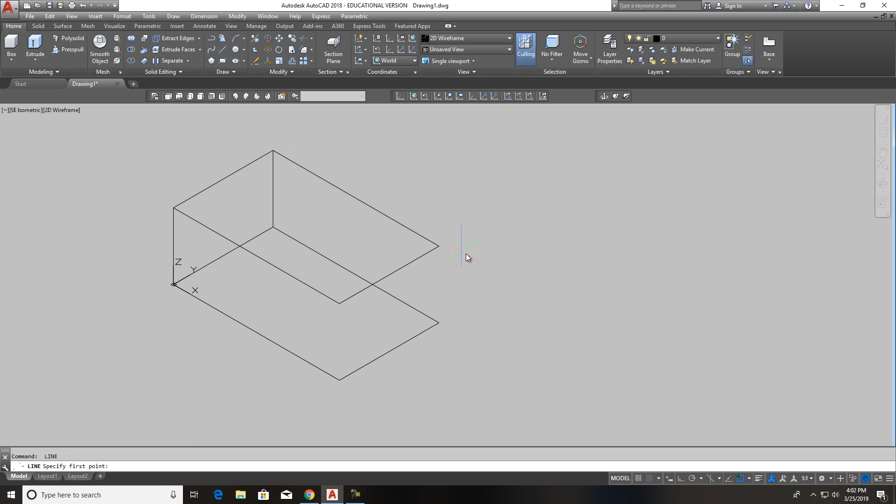And then I always like just to go ahead while I'm in here and just go ahead and connect the dots and make my square, and then I can work off that square to build whatever components I need to build. For instance, if you want to take and draw like a little offset here and down, let's do that.

Let's say I want to come over here maybe a half of an inch, shoot back over here. Just gotta make sure that you snap to it. Come up here, make sure you snap to it, make sure you snap to it, back down. And now I want to come up a half of an inch here, and then back, just like that. Across, make sure it's perpendicular, back across, perpendicular, tie everything in, and then you can pull everything back down.

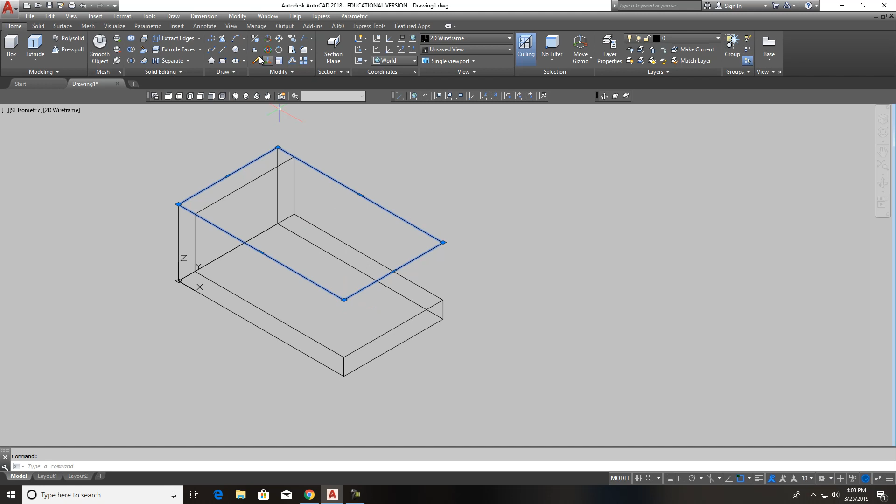Now, I know I've already had a video and you might have done this already, and if you have, that's fine. I just wanted to show you just a few little tricks that might help you when you're wireframing. Let's get rid of that, and then we will take and explode that. You can trim at this point. We'll get rid of all that.

So, you go to your orbit now, and here's this thing, and I want to show you something. This is your X, Y, Z. This is your world coordinate. If I hit world, it doesn't move because that's my world coordinate. These are my user coordinate systems over here, okay?

What they do is this: 3-point is, in my opinion, my favorite. See, if I wanted to work on this plane right here, right now in the world coordinate, you're only going to draw in the XY, and the world coordinates down here. So if I were to go up here and take and put a circle in here and rotate it around, you'll notice that circle is on that XY plane, and this is that XY plane right here. Okay.

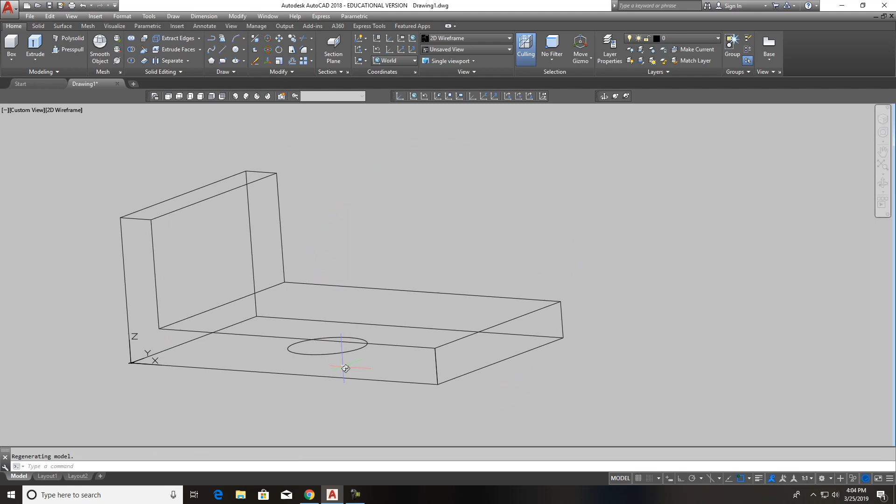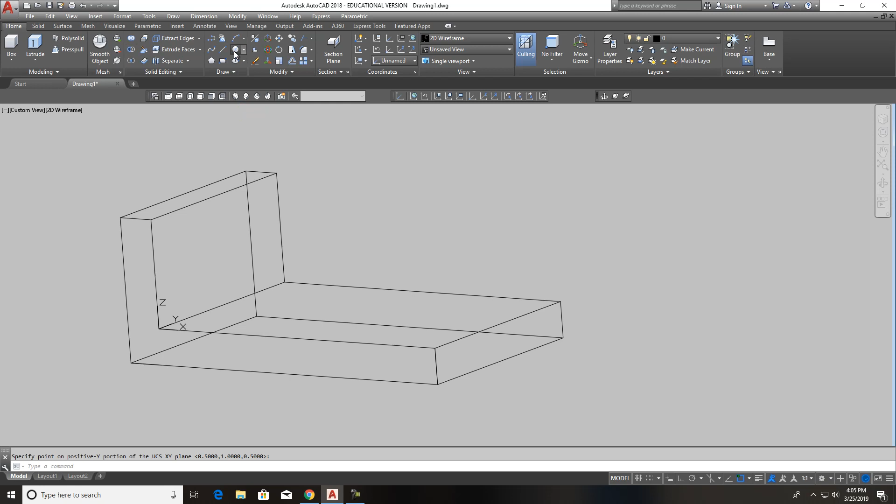Now, if for instance you want to put the XY plane up here on this rectangle, I'm highlighting it. What you have to do is just go up here to 3-point, and the first 2 picks is your X direction, positive, and then the third pick is your Y. See how I put the X this way and then the Y going this way. Now you'll notice if I go up here and put a cylinder or something of the sort, it puts it on that plane.

It's just kind of like a new sketch when you go into Inventor or SolidWorks, kind of works the same way. And again, if you want to go back to your world coordinate, back to its original state, you just hit world, the little globe, and it puts it back to its normal state.

3 point again, I want to be out here. This would be my first point in X. This would be the positive direction in X, my second point. And then Y is my positive direction up there like that. And then you can draw whatever you want to draw on this face. That was my new sketch.

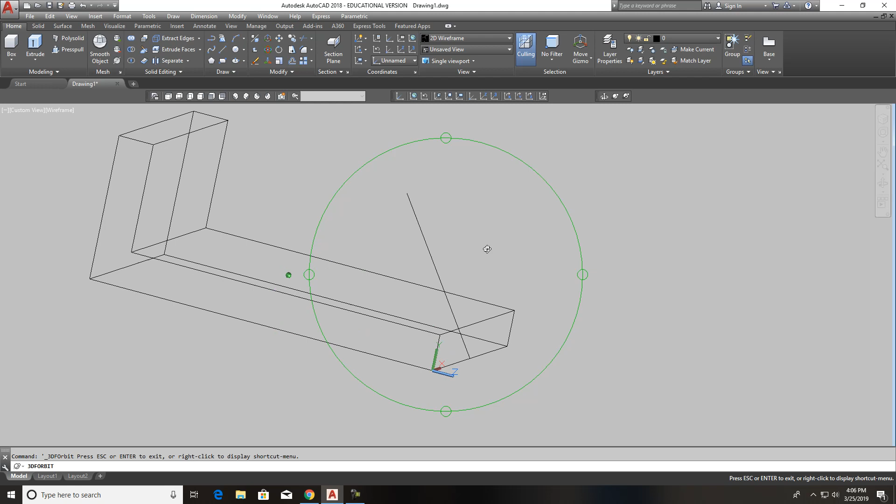Alright, and like I said, you can draw things. This right here, you can draw and come up here to these things, but you just got to make sure when you're going to other lines that you snap to it, because let's say for instance I done something like that, you see what I'm saying? It does something, it'll follow that XY, but if I start here and snap back here to this back line perpendicular or something like that, right there you go. If you snap to that line, it'll actually go to it.

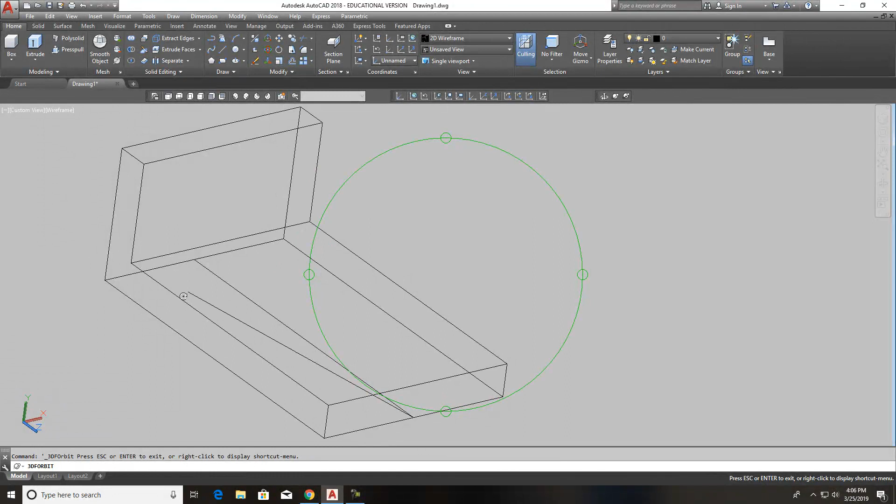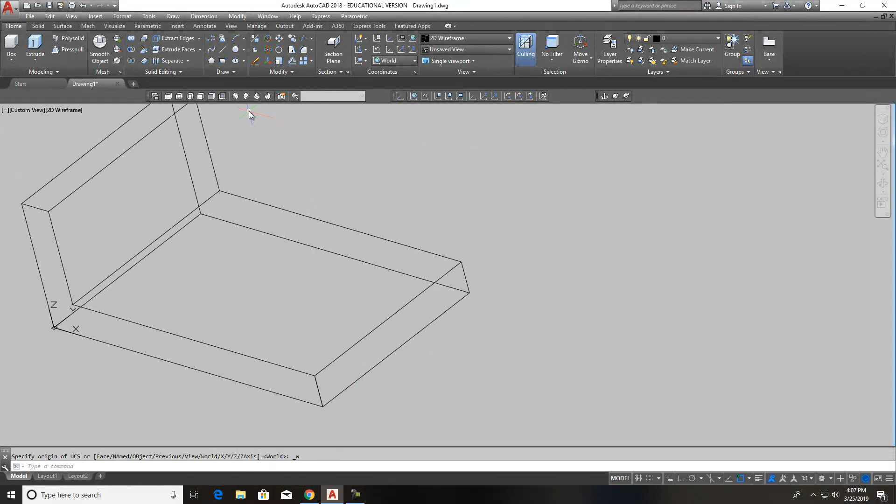Does that make sense? But if you don't snap to nothing and you're just hitting in space, it'll always put it in whatever XY plane that you're in. So just make sure when you're drawing in wireframe that you take a minute or two, hit orbit, and kind of spin this thing around just a fuzz, just so that you know where you're at. Now I want to hit world coordinate and I'll hit southeast isometric. I like to use that one, and when I do that it puts me right back to my original spot when I started so I don't get confused.

So those are a few little things that's going to help you to understand, and also not only the 3 point, but there's a couple more things. You'll see X, you'll see Y and Z. Now what X does, if I click on X, X stays the same. X doesn't move, you see how it's there? My Y and Z's are rotating.

So you tell this thing, I want to go 90 degrees. See how my Y is now going up and down now, and my Z's going this way because I rotated it around that X 90 degrees. So I hit it again and type in 90, it's going to go again like this. My Y is this way, my Z's up and down. If I go back to world, it puts it back to its normal state.

If you want to do Y, it remains solid, and you can take and rotate 90, 180, whatever you want to do. And Z is the same thing as well. I hit world, go to Z. Z is stationary, Z doesn't move. And I can change it to 90.

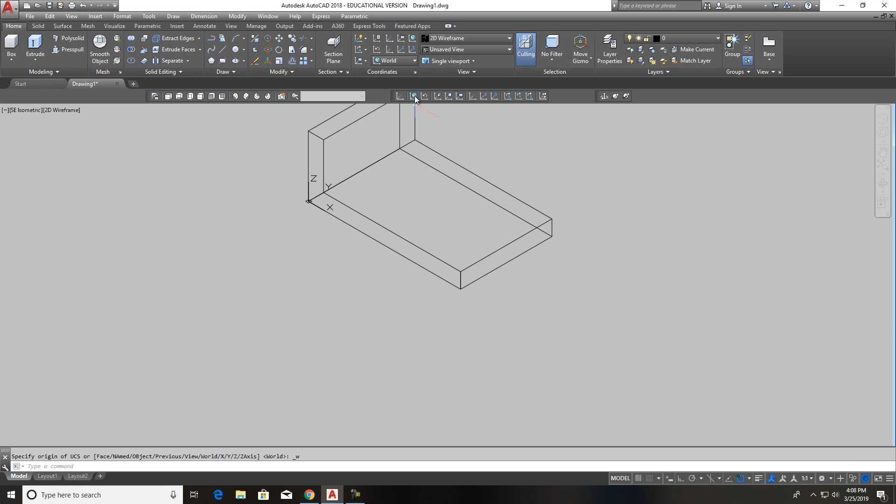Alright, so you can use these tools. Those are handy, but 3 point's my favorite, and just world coordinate, and that will help you to draw and make different planes on AutoCAD when you're doing 3D wireframing. If you need more help, please let me know, because I know this can be confusing, but once you get the hang of it, it's not too bad.